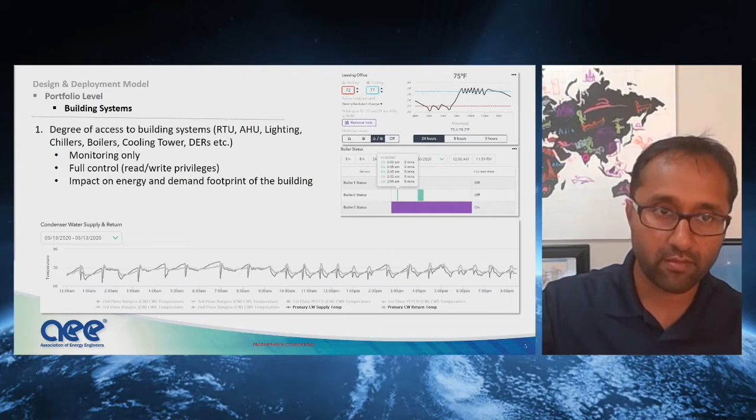Review the incentive landscape, again at the portfolio level. Tons of incentives are available at the state, federal, utility, local level. It helps in building a cohort of building locations later on to have this information early on. In the battery systems world, continuous change in the incentive landscape is just one constant you can be assured of.

Stick to the incentives you have originally modeled, assuming the money is locked in, and the one which is agreed by all project stakeholders. Jumping the incentive ship, if you may, can prove to be tedious, but more so time-consuming.

For fairly established technologies, and battery happens to be one of them, incentives only go down with time. They don't get more attractive over time. So for fairly established technologies, the incentives keep going down, so you might as well latch onto the one you have right now and the one which makes most financial sense.

So once we are done with the portfolio level analysis, we move to a cohort level where we are looking at a group of buildings which can be good candidates for a battery system, as a group or sometimes independently. When I say a group, they can act as a virtual power plant.

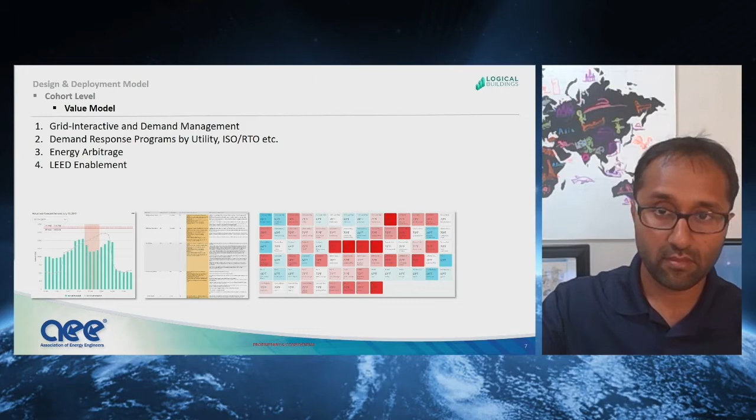We found that amongst the cohort, the pros and cons of the physical location where the battery system is actually placed prove to be very crucial. It goes without saying, as-builts are better than design drawings, and physical field measurements are even better than as-builts. But there's more to assess at a physical location.

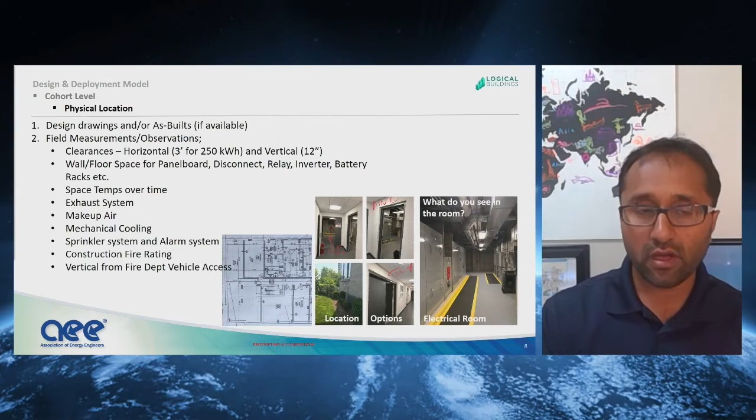Any active mechanical cooling? Where does the condenser go? Construction fire rating of the walls, the roof, and so on. Fire alarm and fire suppression availability. For example, in our building projects, we evaluated multiple physical locations at the same building and weighed their relative merits and demerits to narrow down to a location for the battery.

This is one of the important ones. Getting to know the general interest of the AHJ, or authorities having jurisdiction, is another important metric to consider at this level. What is their general comfort level with battery systems? Remember one thing, you are running the show, not your battery provider who thinks the township is okay, and not your design consultants or your contractor.

You have to ask the right questions up front. Otherwise, there may be potential budget overruns, scope creeps later on. Battery system is a fairly familiar technology in certain jurisdictions, but generally a rarity in many others. So if possible, talk to the building inspectors, propose the system size, battery chemistry, physical location, without going into the code details, address some of these aspects listed here. Like for instance, what kind of hazard mitigation analysis do they require? If there's a certain format and so on.

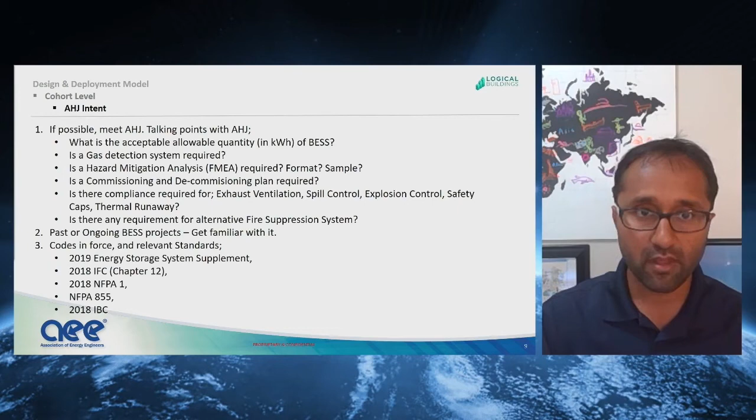So at the cohort level, existing building system design directly impacts the choice of the battery system, the possibility of a DER integration, like a solar PV integration later on, or the shaving of high peaking electric loads in the building. So understand the riser diagrams, the building system itself.

One random comment I would make from experience is if we early on choose a battery system which is rated for 277/480 volts, then it cannot work seamlessly in a building which has 120/208 volt service. And forcing one would mean you have to add a step-up transformer, add additional cooling, which would impact the pricing and the timelines and the scope.

But also try to see if there is any integration opportunity, maybe later on for DER assets, whether we can tie into a solar PV or building integrated photovoltaic later on. Try to think about those.

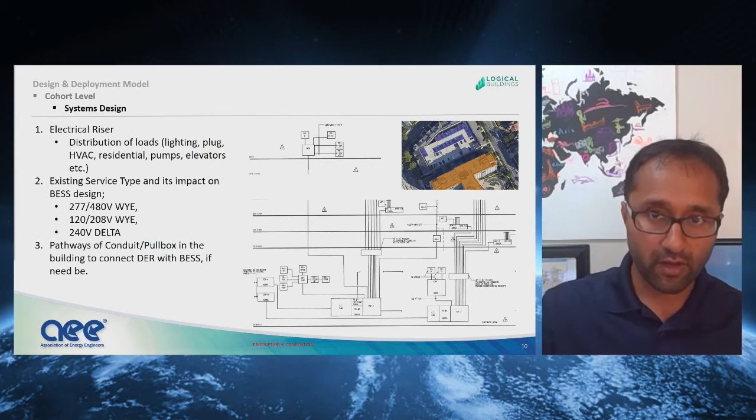So once the building is narrowed down for install, ensure a project structure is in place. Work closely with all stakeholders. And stakeholders is not a homogeneous mix. They all come in, they have different understandings of the technology, the value proposition. So some degree of education and guidance is required there.

So work very closely. Another piece I would like to add is the purchase method. How the method of purchase is structured a lot of times determines the dispatch control logic of the battery system. So think about those. I would advise defining a control logic for the battery system at the time of purchase itself.

All-round education is very accretive. A battery system 101, like what does it do? Components, emergency contacts, and in fact, a full emergency operations or management plan, training for first responders, egress paths, signages will really improve confidence of all site staff in this project. And the word passes fast from site to corporate and vice versa.

Also, some aspects are already detailed as part of code compliance or detailed in standards like NFPA 855, 2018 IFC codes, and so on. Site logistics comes as the next logical step to consider in the design development process. Clear communication with site staff about electric shutdowns, duration of that shutdown, involving stakeholders will really help the project schedule to be on track. Simple processes such as storage require extra oversight.

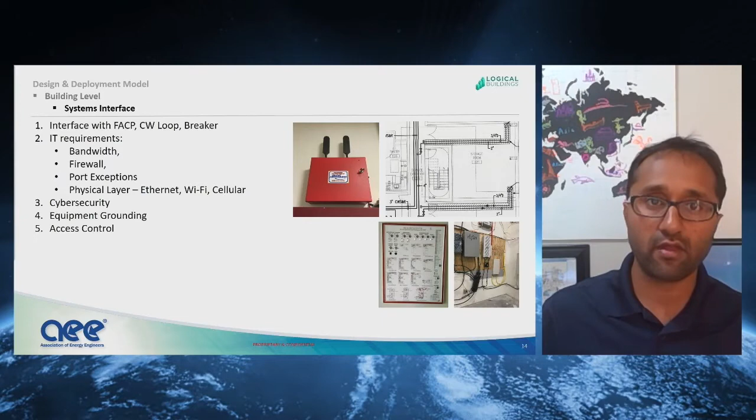And IT can be a completely separate animal in itself. Many battery systems, especially the ESMS or the storage management system, have certain services on the cloud. Make sure to work with your IT early on, have sufficient bandwidth, the firewall should be aware of it, make sure the port exceptions are there, and also make sure the physical layer infrastructure like Wi-Fi, Ethernet, or cellular is available where required.

Last item on my list, which I believe needs its due attention, is the final testing and commissioning. Ensure there's a commissioning plan and it's part of the scope. A commissioning plan is essentially the overview of the processes, the roles and responsibilities, procedures, plans, specifications, all the activities which should take place during commissioning. It should be built into the scope of either the installer, the commissioning agent, or the EPC. And for your information, the commissioning plan is detailed in NFPA 855.

So also remember, any deficiencies and open items need to get communicated to the AHJ and followed through and closed. I have seen many incomplete or marginally complete projects, especially in the DER space, so make sure commissioning is done and followed through.

So that was my super condensed presentation. To summarize, we see that behind the meter, indoor, electrochemical energy storage, in this case lithium-ion battery chemistry, is here to stay. As the technology keeps evolving, and if due thought is given to safety considerations, codes, and standards, a project is viable and accretive.

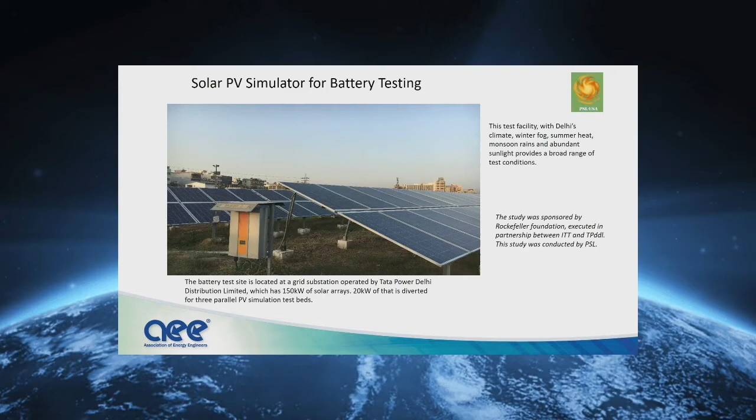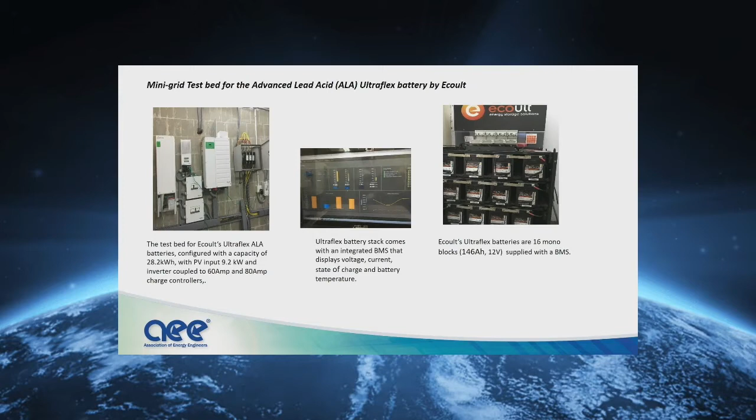What we shall do is explain to you what the mini-grid test beds are for this simulation. The first one is an UltraFlex battery by Ecoult. As you can see in the picture here, the test bed has an Ecoult UltraFlex battery set of 16 monoblocks connected to the inverter and the charge controllers. This is a hybrid inverter. And the UltraFlex battery stack comes with its integrated BMS. So at the very initial stage, the system was separately checked for characteristics using the standard test procedures. And once we moved from the individual test to the PV simulator, what we had to do was create some simulation loads. As you know, mini grids go through variation during the day and variation during the seasons.

And all of that is coupled to what is the load on the consumer end, which was an important part of this simulation. What we had used over here is the AHI, which is the aqueous hybrid ion battery by Aquion. At that time, in 2017, this was an emerging battery, and we managed to take this to the site. And what you have here is a 28 kilowatt hour battery stack configured with 9.2 kilowatts of PV and coupled with a 60 amp and an 80 amp charge controller. The UltraFlex battery was the first thing.

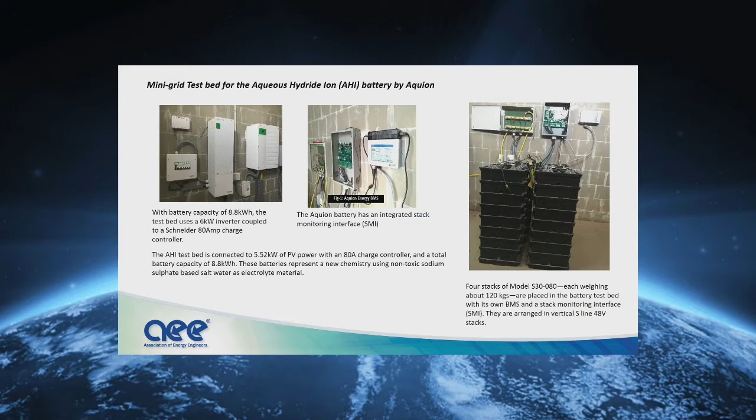The AHI test bed was connected to 5.52 kilowatts of PV and an 80 amp charge controller, as you see over here. One unique thing over here is the Aquion battery has an integrated stack monitoring interface. So that monitoring interface is used for measuring all of its operational characteristics with the current and voltage of these individual cells in there. And this test bed is also a parallel test bed like the UltraFlex.

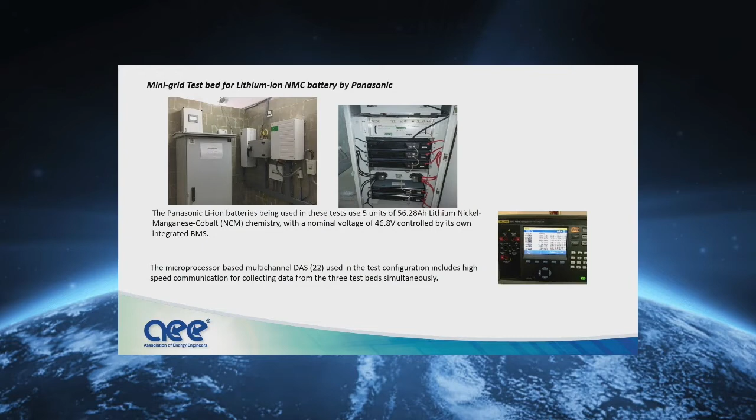The microprocessor-based multi-channel analyzer has been used in the test configuration. This includes high-speed communication data collection from 3 test beds simultaneously. That was the advantage we had in performing this experiment, giving all of the test beds the same environmental condition, the same PV insolation, and simultaneously going through the simulated load, which was an effort of nearly 2 years. And the value of that will be shown when we go to our next analysis.

So the PV system, the battery capacity, inverter size, all of them represent a scaled down model of a typical mini grid. The system has been set up just as it would have been for any typical off-grid PV power plant. The manual involvement is very limited. It is limited to programming electricity usage patterns as load profiles on the automatic load simulator. In case we have to change the load pattern, that's the only time there is any manual interference.

Otherwise, running the data acquisition system in case there has to be some work on that. And the last is in case of emergency, there would be any manual intervention. Otherwise, it's a day-long process, programmed load pattern with the natural insolation. So that's the key thing about solar as to how well the load is simulated. The procedure taken up was the PV arrays charged the batteries, and the load simulator generated various kinds of energy and power consumption patterns.

As we know, the rural consumers typically have small loads at a household level, especially during the daytime, and larger loads in the evening time, larger in terms of accumulation of loads, whereas commercial and enterprises have daytime loads, which can often include some sudden loads like a drill machine or water pumping, etc. So the load profiles based on data from active mini-grid scenarios are programmed into the load simulator.

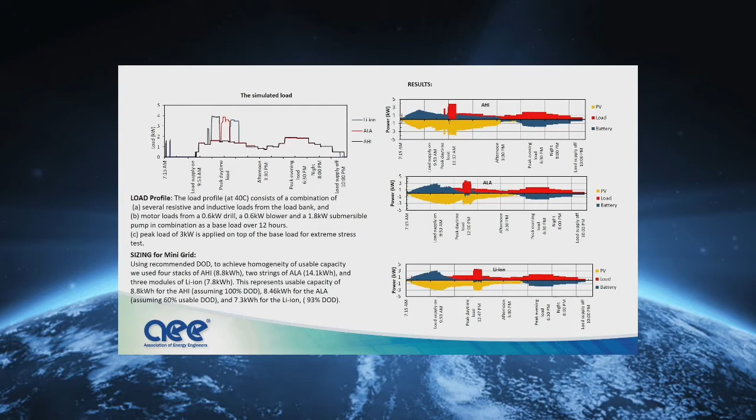Having said that, if you see on the right-hand side the results we observed, the AHI battery has responded very well to the stress load coming from the 3 kilowatt load. Same with the ALA battery and same with the lithium-ion battery. The yellow is the PV solar charging, the battery is in the blue, and the load is in the red. All 3 batteries performed through the whole day, went all the way up to 10 p.m., and successfully went through this test.

In a real case scenario, where you do not have much control over observation versus management of load locally, one has to rely on the battery's state of performance. So it is the manufacturer's description of how the batteries should be used, keeping within the limits of depth of discharge. We made certain findings in our test: we monitored the current and voltage as indicators of the battery performance and its health. Apart from being able to provide enough energy, as I showed in the last slide, it also had to do with how well the battery performed internally, which is not measurable from outside.

So here are the results from the current and voltage. As you can see, the AHI battery has been consistent with its control tests that we had done separately, and the other batteries also did the same. The AHI has a dip in the voltage, a voltage drop after introduction of high power loads. Not being a power battery, this is more of an energy battery and a stationary battery, so it experiences that voltage dip with the introduction of high power.

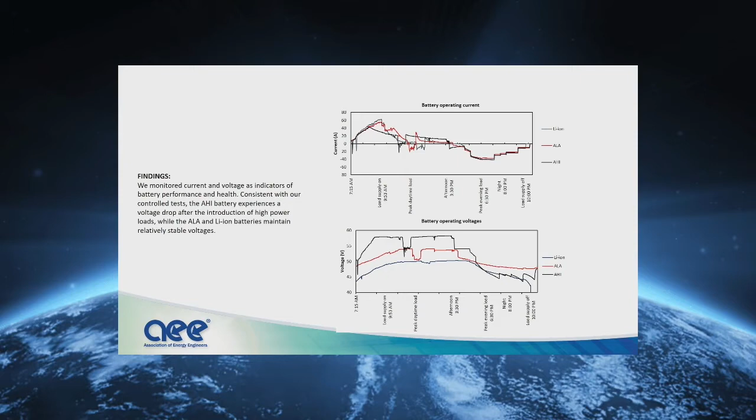So what we shall summarize in conclusion is a little bit to the effect that the lithium-ion battery has a combined benefit of both the batteries that we have tested. How did we come to that conclusion? So amongst all three, the advanced lead acid battery, which is an ALA type that we call ALA battery, has an ultracapacitor in the plates, and therefore it's a modification of the regular lead acid battery.

It sustained high power discharge for a long time during the stress test, simulating a sudden power surge with a motor. So that motorized sudden load, it could take very comfortably, very easily, because it's a power battery. Another strength of the ALA battery is its high charging capability and discharging capability,

which may not be as important in terms of a mini grid situation, because our charging is from PV, which is a low C rate charging. And therefore, this is not very uniquely important unless there is diesel genset related charging, which would require a high rate of charging. The battery demonstrated a relatively flat operating voltage as a function of SOC.

This is another important thing as to how the battery voltage changes with the state of charge. As long as it's flat, its operational characteristics would be more accommodating towards the loads on the system. It's less sensitive to temperature rise. And the limitation, I would say, is it's designed for partial SOC operation and strictly remains within the 30 to 90% range.

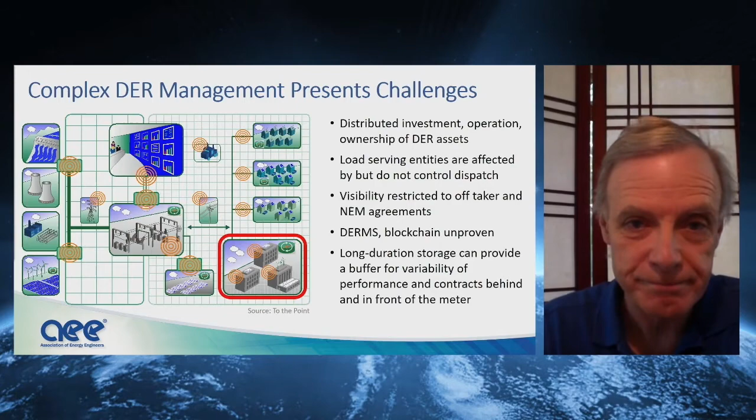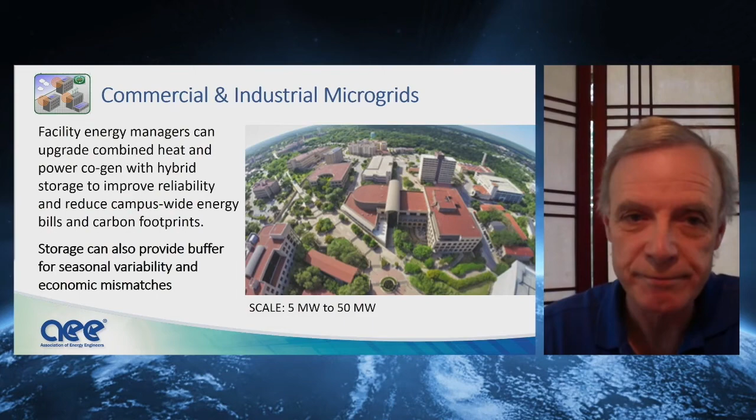Long duration storage can also help provide resiliency for microgrids during things like public safety power shutoffs that we've had here in California in response to fires, but also other events, whether they are weather related or man-made catastrophes of some kind. So the resiliency thing is something that comes along for the ride with storage.

Now, we all know that electrical and thermal loads vary daily and seasonally. Solar production peaks, of course, during the daytime and is non-existent at night. But the loads themselves also vary. They vary with the climate. They vary around the country. They vary with the season and the daily weather patterns. The load within a building depends on its use. It may be occupancy related and varying, or it may be a data center, which is a more or less fixed load. But the important thing is we all have a commitment to sustainability, and we have to respond to the economic pressures. So flexibility improves our ability to manage and respond to all of those things.

Now, when we're talking about storage, it's important to note that electricity can't be stored. It must be transformed into another form of energy for storage and then converted back to electricity. So we have many means of doing that. The electrochemical battery, lithium, lead acid, other kinds of batteries, electrochemical batteries do that, converting electricity into electrochemical energy stored

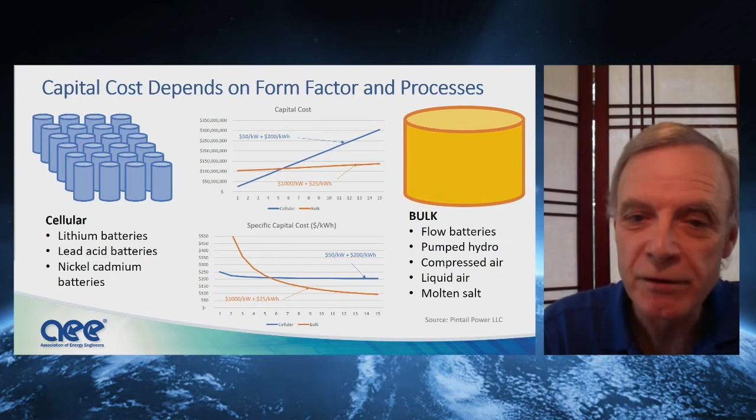And when you then normalize that to a dollar per kilowatt hour basis of the amount of energy that's stored, you can see that batteries will tend to have an asymptote that is fairly high, and that the bulk storage media will prevail in terms of capital cost when we go to larger scale.

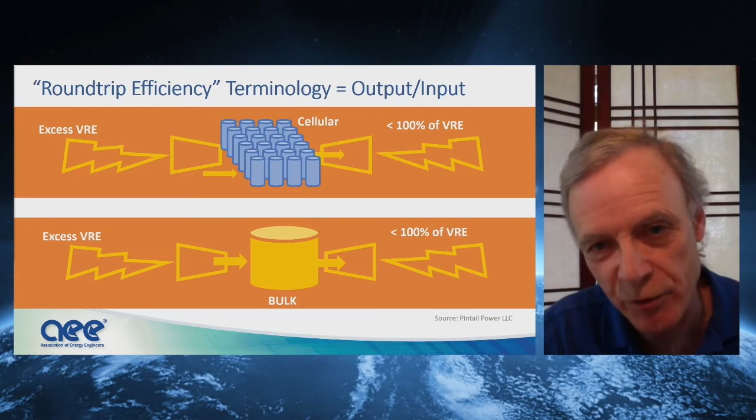Another thing that's important is the round trip efficiency. How much output do we get per input? And these are roughly measured the same for both kinds of systems. The efficiencies are different based on whether it's a battery, which tends to have relatively high round trip efficiency, versus some of the others that are thermal or mechanical processes that have lower round trip efficiencies. So now we see that we have to balance the capital cost from the previous slide with the efficiency.

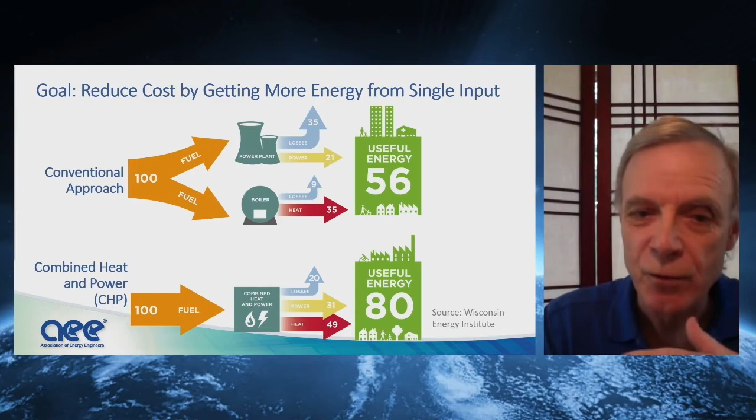Now, in the facilities business, we're all familiar with combined heat and power. In a CHP system, we need two forms of useful energy. We need electricity from a power plant, and we need thermal energy, say steam, from a boiler. And we can use fuel into two different pieces of equipment to provide that. Or in a CHP system, we can use that fuel and get the two outputs from a single system. And that allows us to get more energy from a single input. So now that's going to set the stage for hybrid storage.

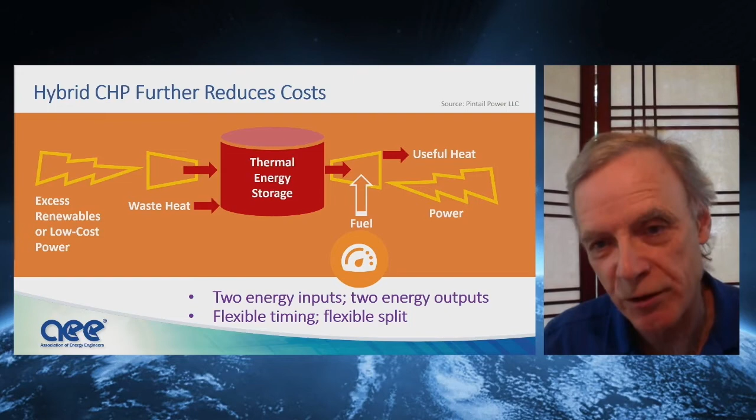So just as you can imagine in a CHP system, determining your efficiency and the relative value of electricity and thermal energy is important. Likewise here, where we have multiple input streams and multiple output streams, the economics requires some careful analysis. But what we do get is flexibility in timing of when we put energy into storage and when we take it out, and flexibility in the split of how we use that stored energy for producing electricity and useful heat.

So let me tell you about one approach to that of hybrid storage using molten salt or liquid salt in what we call a liquid salt combined cycle. And the reason to do this is to minimize both the costs and emissions of GHGs by an optimal mix of fuel, electricity, and the use of waste heat. So we can take low-cost energy when it's available. That may be renewable energy from the grid, renewable energy locally, or energy that is produced from the CHP system, but has no use on the campus and has limited value when exported back to the grid.

So we can store that energy, and then we add fuel into this system to deliver both power and heat to the load. And that allows us to dynamically match thermal and electric loads while minimizing GHG emissions and at lower invested cost than batteries.

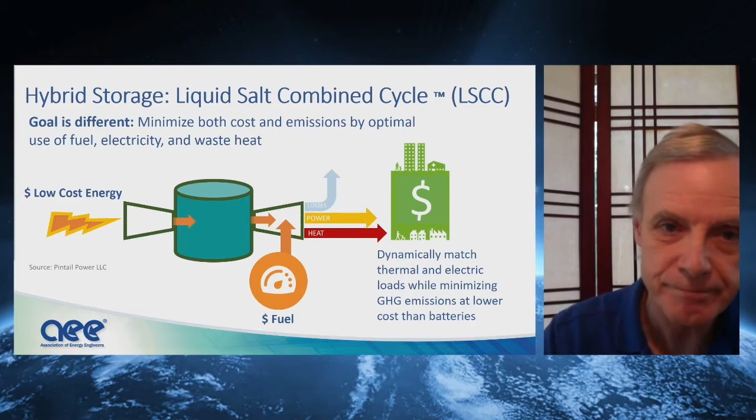This hybridization of energy storage with fuel and heat creates a number of synergies. Thermodynamically, we get the potential for higher discharge power from the equipment. We reduce cost because we have higher storage efficiency by combining the heat from an engine with the thermal store. We remove a number of design constraints having to do with corner cases, with materials and so forth through this synergistic integration.

Development is eased because we're using proven components in the system, thermal components that are familiar and understood and available from a supply chain of manufacturers of engines and turbines and heat transfer equipment. The storage footprint is greatly reduced compared to alternatives because of that storage efficiency. And we add flexibility to match thermal and electric load. And finally, this approach allows us to reduce fuel consumption by optimally displacing fuel and replacing it with electricity when that's economic.

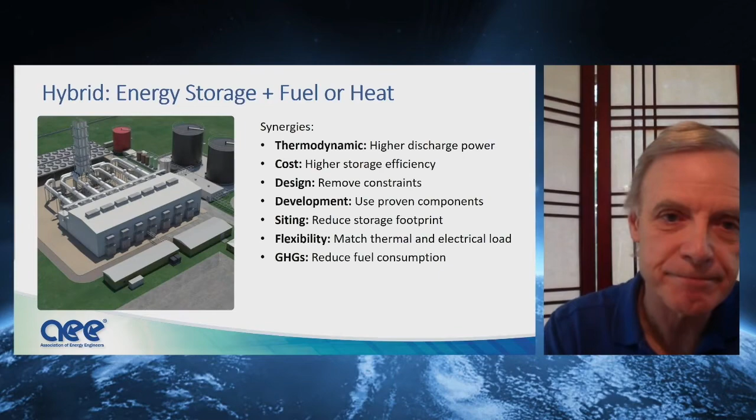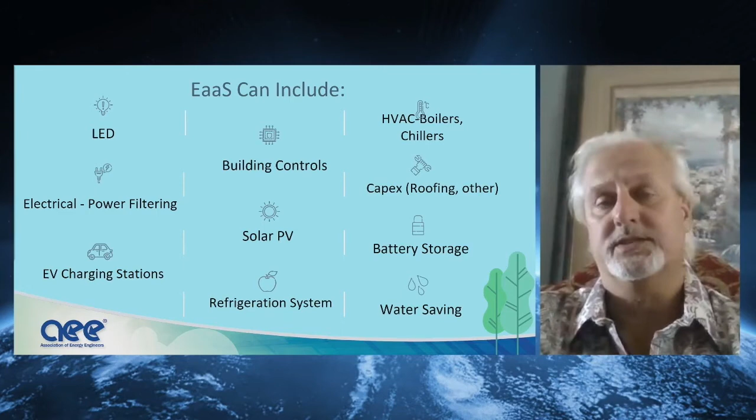So what is this energy as a service model, and how are we combining it? So historically, you couldn't include typical energy conservation measures in a solar power purchase agreement. And so what we've been able to do is, by looking at the equipment as a service item, an item that can be installed, that you can use, and then we, the developer, service it for you.

What's interesting is that for the solar PV and battery storage, we no longer require a 20-year PPA, which is mostly unheard of in a lot of areas because the tax equity structure of the PPA requires a 20-year amortization time frame. Not the same here. We're doing solar and battery storage efficiency agreements in 10 years now,

which helps for certain parts of the world. Hawaii, where I do a lot of my work, has a lot of leasehold properties, meaning there might be less than 20 years left on that lease, and therefore you couldn't do a 20-year agreement because it's not coterminous with the end of the lease, which most require. So we're able to do it in shorter periods. The effective PPA rate's a lot lower because we don't need the tax equity piece, which is, as many understand, the most expensive part of it. So it gives you a lot of flexibility.